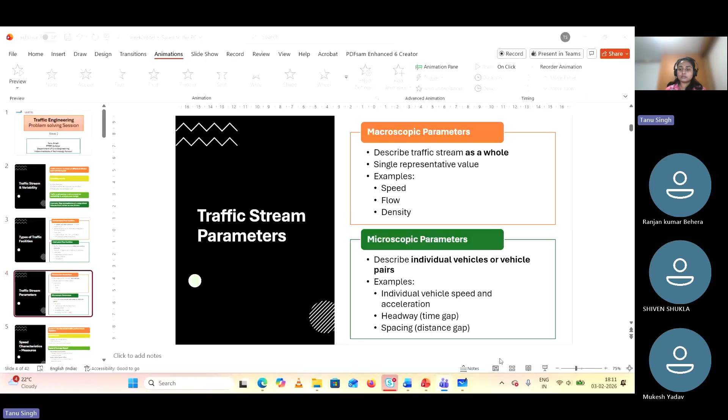Now, as we have just seen, there are three parameters: speed, flow, density, and in microscopic parameters, individual vehicle speed, headway, spacing. So we will go one by one to understand these parameters. First is speed. Speed is the most important traffic parameter. It measures traffic performance and is fundamental in road design and traffic simulations. Speed can be divided into two types: time mean speed and space mean speed.

Time mean speed is the average speed of vehicles passing a fixed point over time, calculated as the arithmetic mean, whereas space mean speed represents the vehicles over a road length and is calculated as the harmonic mean. So for time mean speed, at a particular point, whatever speed a vehicle passes through this point is measured, whereas for space mean speed, over this distance, we calculate for each vehicle its speed over this road length. This is the difference between time mean speed and space mean speed.

And always remember that space mean speed is always less than the time mean speed, because lower speed vehicles occupy the roadway for a longer time. Therefore, space mean speed is always less than the time mean speed.

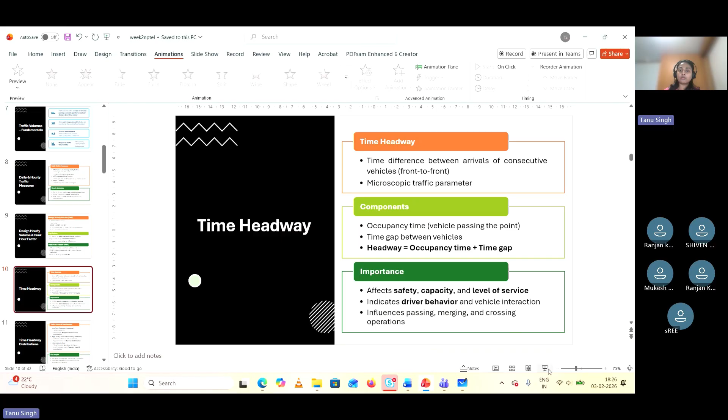Okay, so now we have understood what is time headway. Now we'll understand what is time headway distribution. So time headway distribution varies at different traffic conditions. At low traffic volume, if there is very low traffic, that means the time headway between two vehicles is more. So at low traffic, vehicles interact very little with each other. As a result, headways appear random. So headway is random and it is mainly represented by a negative exponential distribution.

And when the traffic flow is very high, very high means time between two vehicles is very low. So it is mainly a condition of the platoon, or it is a condition of a traffic jam. So in those cases, headway distributions are mainly approximated by a normal distribution. Now, third is the intermediate, that is in between the high and low traffic volume. It is a mix of random and platoon behavior. So that is mainly represented by a Pearson type 3 distribution.

So these are the three distributions. That means there is no single distribution that fits all conditions, like high traffic or medium or low. We cannot fit using a single distribution. For each of the conditions, we have three different distributions, that is negative exponential for low, normal distribution for high, and Pearson type 3 for the intermediate. So this is all about the headway.

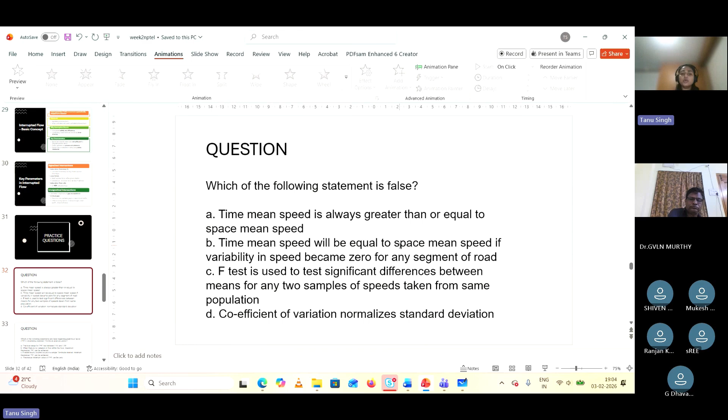Okay, so the correct answer is C, which was answered by most of you. Now we will discuss. The first statement is that time mean speed is always greater than or equal to space mean speed. That is correct; space mean speed is always less. Then, time mean speed will be equal to space mean speed if all the speeds of the vehicles are the same; from the formula, both will come out to be equal. Therefore, this is also true.

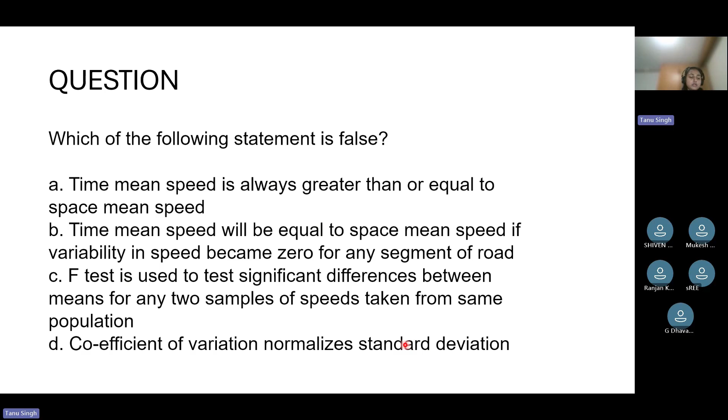Then the D statement was coefficient of variation normalizes standard deviation. That is also correct. But statement C mentioned that the F test is used to test significant difference between means of any two samples of speed taken from the same population. That is false because the F test is primarily used to compare variances, not the means of two samples. To test the means of two samples, we can use either a T test or an ANOVA test. So statement C is false, as answered by most of the people.

Now coming to practice question number 2: which of the following statements are false regarding peak hour factor, considering standard 15-minute analysis? Statement A: the practical range for PHF lies between 0.5 and 0.88. Statement B: when there is no variation in flow within the hour, maximum theoretical PHF can be achieved. Statement C: if the entire hourly volume occurs in a single 15-minute interval, minimum theoretical PHF can be achieved. And D: theoretical minimum value of PHF can be zero. I'm waiting for all of you to answer this question in the chat box. There can be more than one answer to this question.

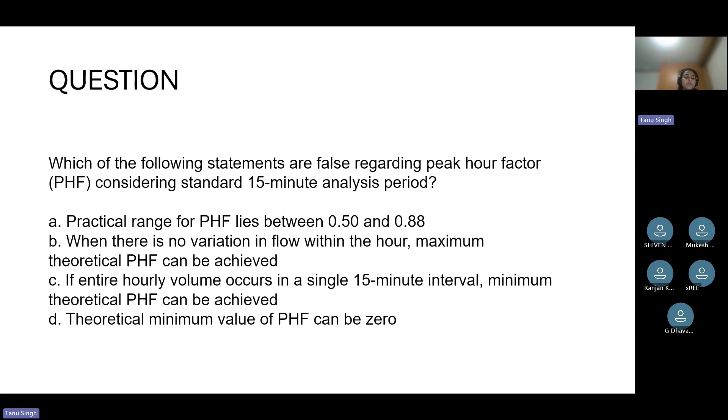Okay, so yes, the correct answer is A and D because we have already seen the practical range is between 0.7 to 0.98. So the first statement is false. The second statement says that if there is a uniform, there's no variation in flow within an hour, maximum theoretical PHF can be achieved.

That is true because the maximum value that we can achieve is 1, whereas the minimum PHF value is 0.25. So how it's 0.25: say if the entire hourly volume occurs in a single 15 minutes, then it will be the minimum. Okay, so yes.

Okay. So this is the formula: PHF is equal to hourly volume divided by 4 into maximum 15-minute volume. If all the traffic volume occurs in that 15 minutes, that means V is equal to that maximum 15-minute volume. So this will be equal to 1 by 4, that is 0.25. So the minimum value that we can achieve is 0.25.

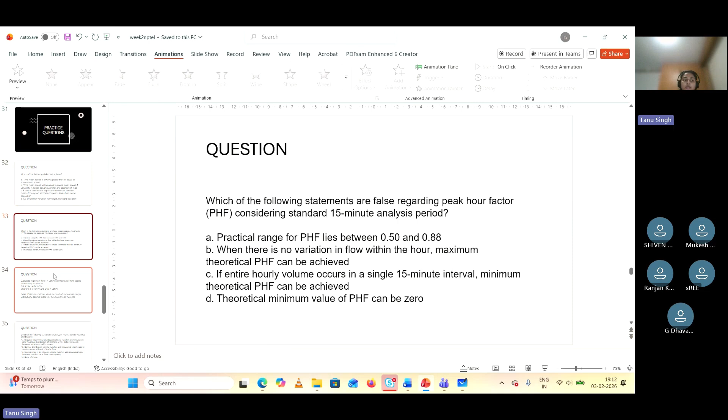Now coming to the next question, that is to calculate the maximum flow of the road if the flow-speed relationship is given as Q is equal to 215 V minus 41 V ln V, where V is in kilometers per hour and Q is in vehicles per hour. So we need to get the nearest integer value.

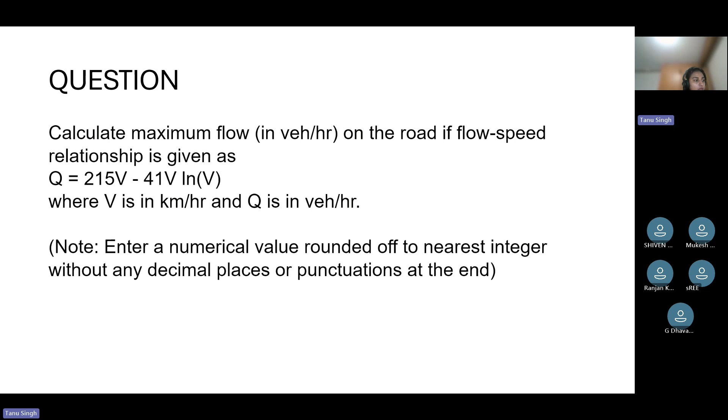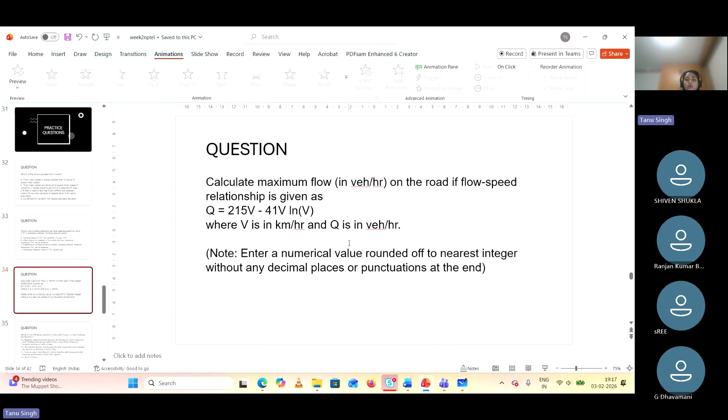Okay, so it is required to calculate the maximum flow of the road if the flow relationship is given. So maximum flow occurs when we differentiate with respect to V, that is dQ by dV is equal to 0. So now we differentiate Q with respect to V. This is 215V minus 41V ln V. So what we get? dQ by dV is equal to 215 minus 41 times (ln V plus 1).

Okay, so then it's equal to 215 minus 41, and then we simplify further. So we get 41 ln V is equal to 174, and ln V equals 174 by 41, which is equal to 4.24, and we do antilog and we get V as 69.6 kilometers per hour.

Now to calculate the maximum flow, we write Q max is equal to 215V minus 41V ln V and put the value of V in this equation, and the answer that we get is 2855. When we subtract 12109 from 14964, we get 2855. So we're getting it between 2852 to 2856. That is the correct answer. That can be a mathematical decimal equivalent to that.

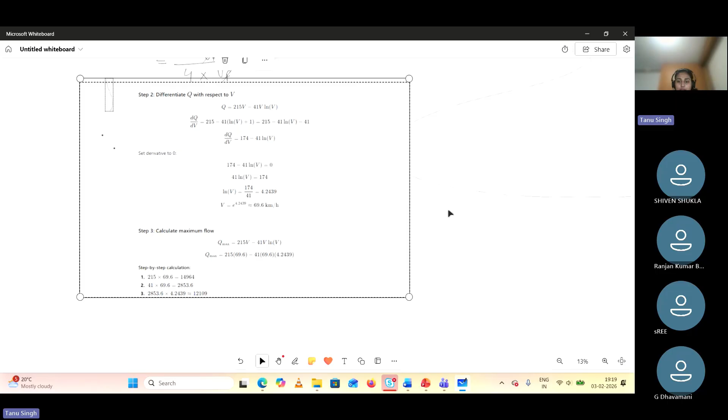So now coming to the next question. Which of the following statements is false with respect to time headway distribution? So first one is: negative exponential distribution closely matches with the measured time headway distribution when there is very little interaction between vehicles in the traffic stream.

Normal distribution closely matches with the measured time headway distribution at all levels of traffic flow. Pearson type 3 distribution closely matches with the measured time headway distribution at flow near capacity. And then D is none of these. This we have already discussed while we were summarizing. All these questions are related to the time headway distribution that we have discussed.

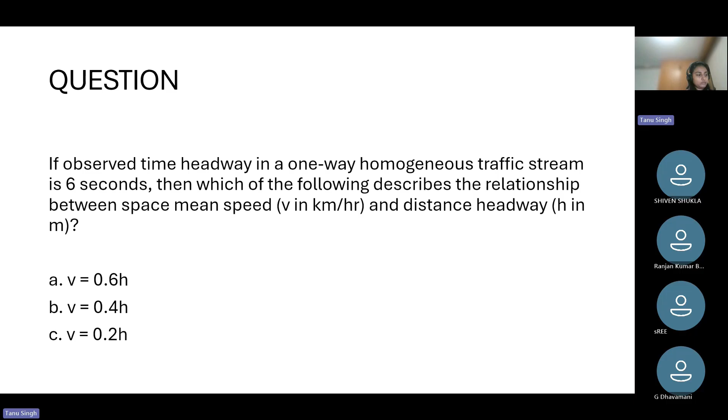Okay. So the answer is A. That is, V is equal to 0.6 H.

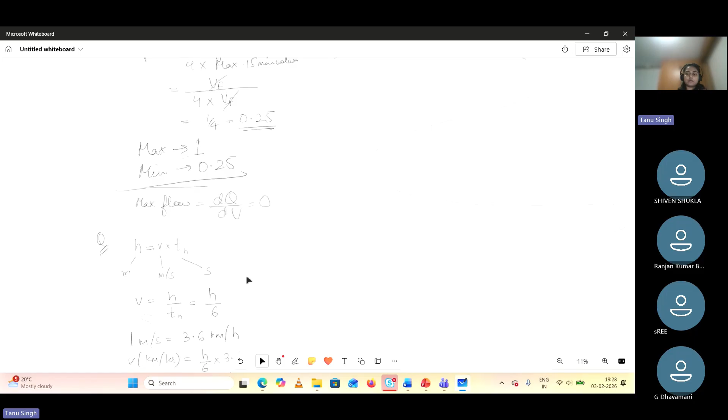So the formula is H equals V into TH. H is the space headway, the distance headway. V is the speed in meters per second, whereas TH is the time headway. So V will be equal to H by TH, and TH has been given in the question as 6.

And since it's been asked in kilometers per hour, we will be converting: 1 meter per second equals 3.6 kilometers per hour. Therefore, V in kilometers per hour will be equal to H by 6 into 3.6. Therefore, we get V equals 0.6 H. So option A is the correct answer.

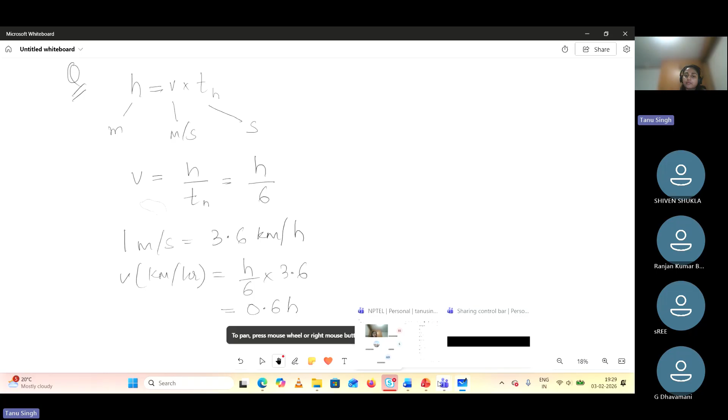Okay, so now coming to the next question, in terms of accept or reject: congestion cannot occur at uninterrupted flow facilities. Answer whether it is an acceptable statement or a reject.

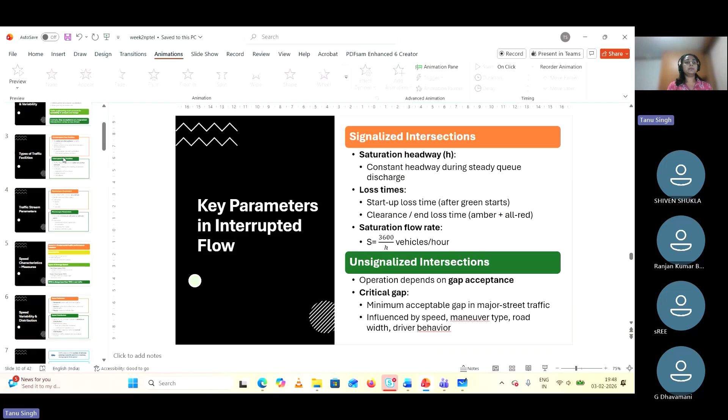I will just summarize today's problem solving session, what we have gone through. Okay, so then we summarize the lecture. First we started by saying there is a variability in the traffic stream because of different types of drivers, their behavior, different types of vehicles that can be found on the road, and different types of road geometry. So there is always a variability in the traffic stream.

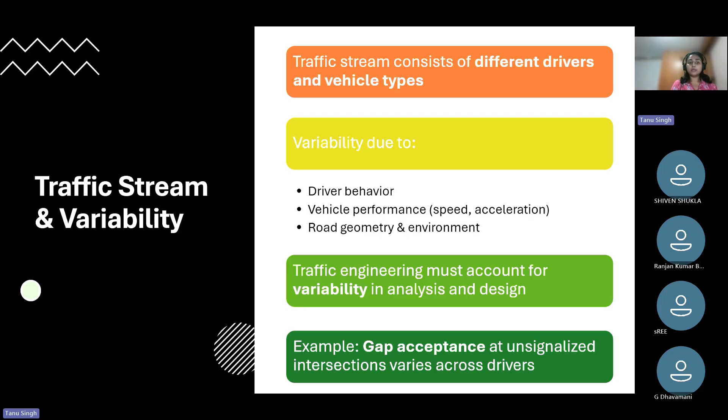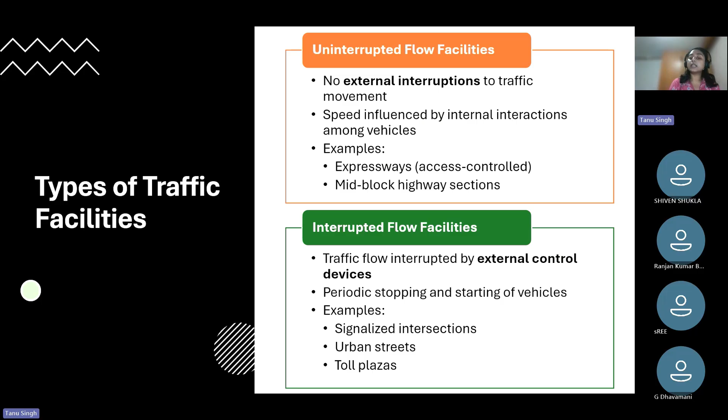Next, we have seen the different types of traffic facilities. There are uninterrupted flow facilities and interrupted flow facilities. Whenever there is an external control, the flow facility is interrupted, whereas where there are no external interruptions like signalized intersections or toll plazas, it is uninterrupted. So expressways or mid-blocks of highway sections are examples of uninterrupted, whereas signalized intersections, urban streets or toll plazas are interrupted flow facilities.

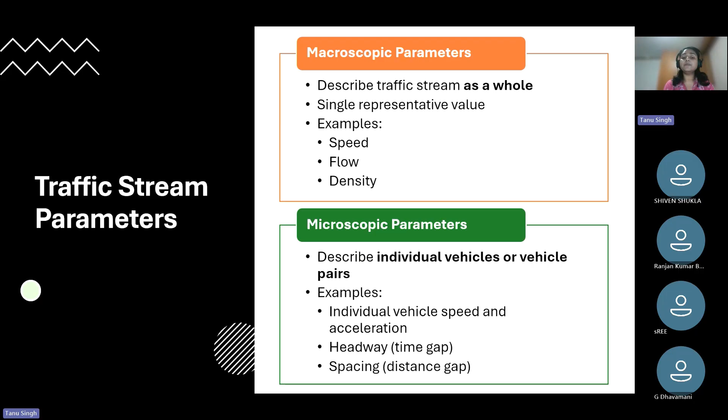Then we have gone through the traffic stream parameters, which can be macroscopic or microscopic. In macroscopic, we treat the traffic stream as a whole, represented by a single value such as speed, flow, or density, whereas the microscopic parameters deal with individual vehicles or pairs of vehicles. Here we consider the individual vehicle speed or acceleration, the time gap, and the distance gap.

Then we have gone through speed. Speed is the fundamental traffic performance measure for road design, for the analysis of fuel and emissions, and also for traffic simulation. Then we have discussed two types of average speeds, that is time mean speed and space mean speed. The time mean speed is the average speed at a point over time, which is the arithmetic mean, whereas the space mean speed is the average speed over a road length, that is the harmonic mean.

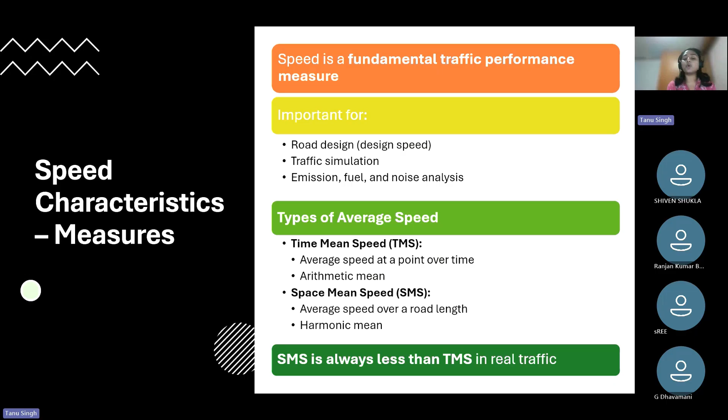And space mean speed is always less than the time mean speed. Then we have gone through the speed variability. Speed can vary depending upon time of the day, different locations, and also by different type of vehicle. Different vehicles will have different speeds. Some are slow moving vehicles, whereas some are fast moving vehicles. Then the speed distribution is often approximated as the normal distribution.

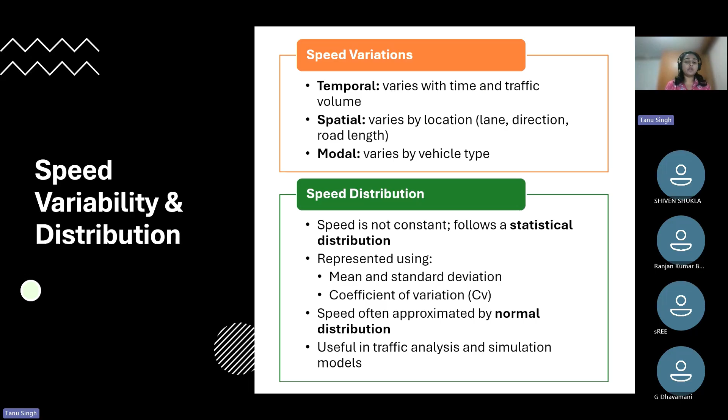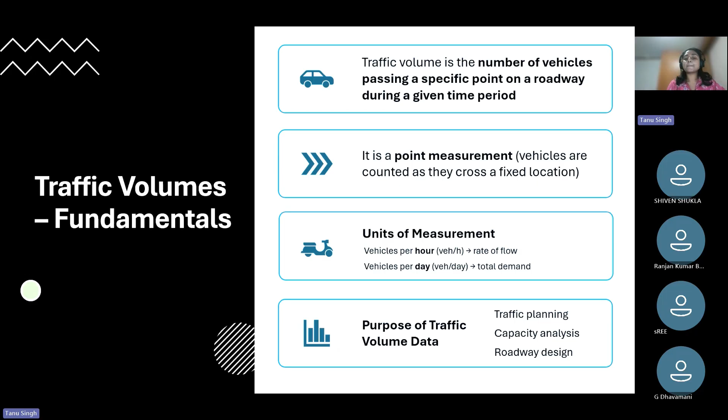Then we have looked at a different parameter, that is traffic volume. Traffic volume was the number of vehicles passing through a point over a period of time. It is always a point measurement. Whenever a vehicle passes through a point, we add it to the number of vehicles over a period of time. It is measured in vehicles per hour or vehicles per day. And its purpose is traffic planning and roadway design.

We have seen different traffic measures. First, ADT is mainly for design purposes. We have also seen the average annual daily traffic, weekday only traffic, and also discussed hourly volumes, because traffic varies, and we can see the major traffic at morning and evening peak hours. Then we looked into design hour volumes and peak hour factor. Design hour volume is defined as AADT into K into D, where it has been taken as the 30th highest hourly volume. We take the 30th to balance economy as well as efficiency.

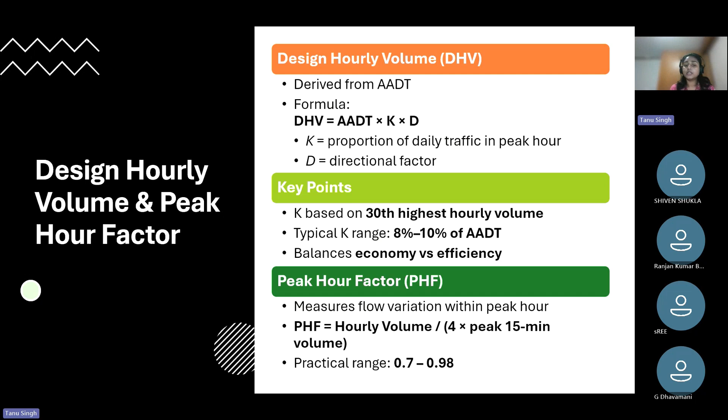Then we looked into what peak hour factor is. Peak hour factor is hourly volume divided by 4 into maximum 15-minute volume. Its practical range was 0.7 to 0.98. Then we looked into time headway. The time headway was the time difference between the arrival of two consecutive vehicles, whereas the space headway is the distance between two vehicles. Please remember, it is always front to front: front of the first to front of the following, not back of the first and front. It comes under microscopic because we are talking about a particular vehicle. These are mainly calculated to learn driver behavior and also passing, merging, and crossing operations.

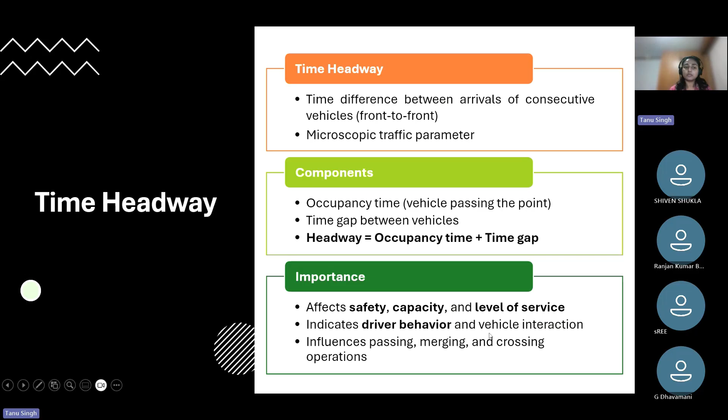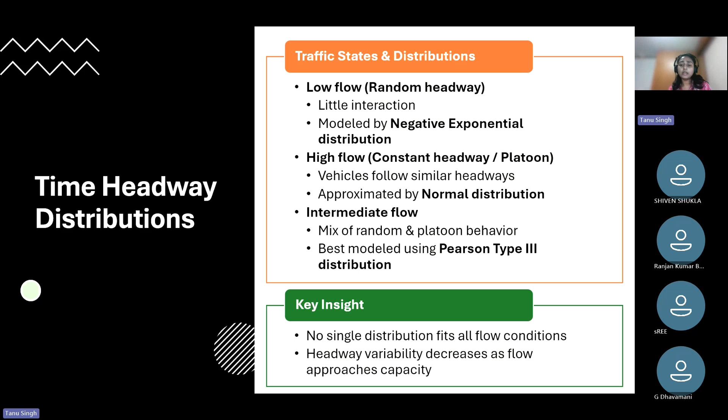Then we looked into the distributions. For low flow, it was negative exponential. For high flow, it was normal distribution. Whereas for intermediate flow, it was best modeled by a Pearson type 3. And we found that there was no single distribution that fits all flow conditions.

Then we looked into the other parameter, that was traffic density. Traffic density was the number of vehicles per unit road length. It was important to understand driver maneuverability and discomfort. It directly affects the traffic flow quality. It can be directly measured by standing at a vantage point and recording a video, whereas indirectly it can be calculated using the formula K equals Q by V. We have seen different levels. If traffic density is 0, it means an empty road. If it is maximum, then it is a jam condition.

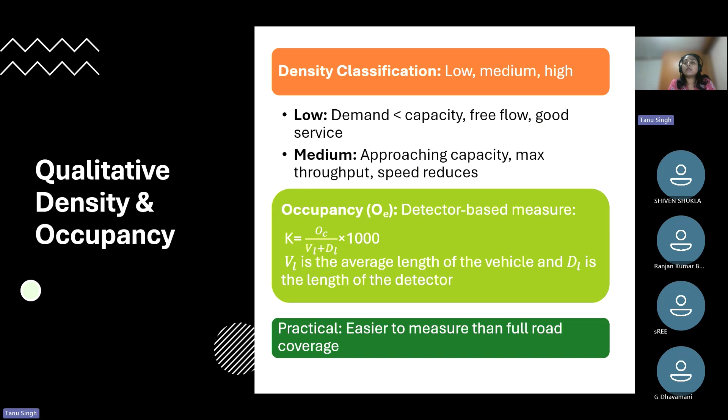Then we also saw how to calculate density from occupancy using a sensor-based method. The formula used was K equals O by (VL plus DL), that is the average length of the vehicle plus the length of the detector. This method was used because it was easy to measure. Then looking into a road of 1 kilometer and calculating the number of vehicles in that particular road length.

Then we have seen how to convert microscopic to macroscopic. These time gap and distance gap can be converted to density and flow. Density can be calculated by 1000 by space headway, whereas flow can be calculated by 3600 divided by h. And V is calculated by Q by K. So this was all about the microscopic and macroscopic parameters.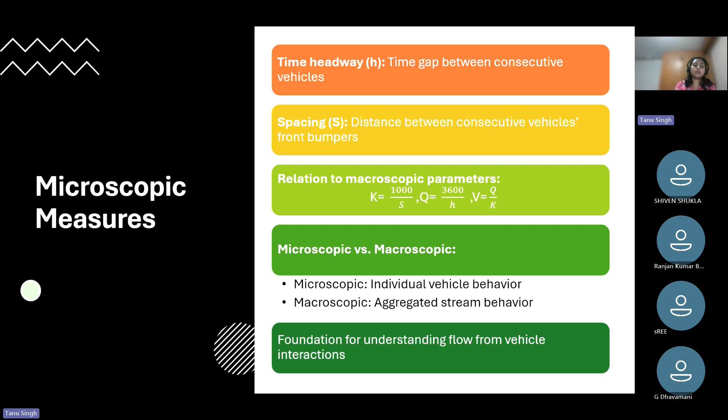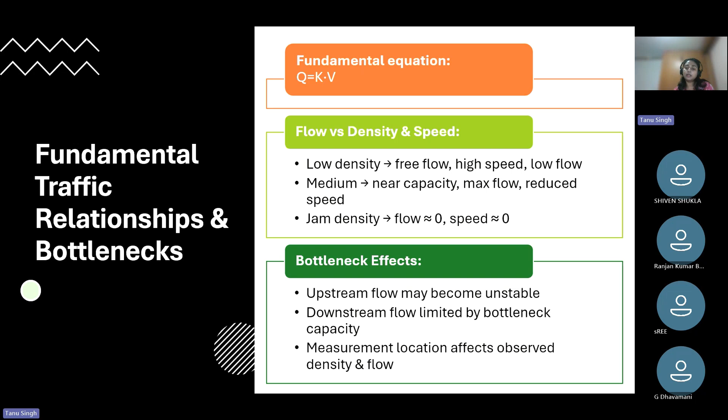Then we went to the fundamental relationship between these three, that is flow, density and speed: Q equals kV. We have seen that at low density there are free flow conditions. At jam density there is a condition where flow is zero and speed is also zero. But there is also a condition, the bottleneck, that might affect these things. There might be a condition where upstream and downstream become unstable and they are limited by the bottleneck conditions.

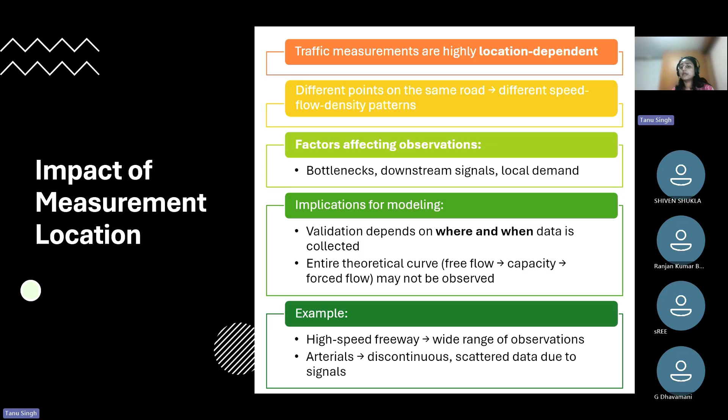Then we have seen that the location where we are measuring these parameters may affect their values depending upon bottlenecks, signal conditions, or local demand. So this validation depends on where and when we have collected the data.

Then we have seen the field data versus theoretical. We found that the field data confirms the trend, but it doesn't clearly match the theoretical value. Theoretically, we assume all these VK, QK, and KV relationships are smooth and continuous, but they are not so in the field data observation.

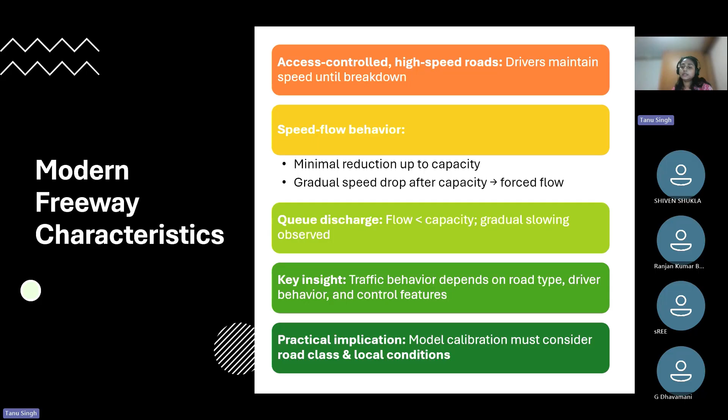Similarly, in the modern freeway characteristics, the driver maintains speed until breakdown, then there is a minimal reduction up to capacity, but the speed drops after the capacity. So traffic behavior depends upon the road type, driver behavior, and control features.

Then we have seen different types of regimes. The first one was the single regime. Single regime means only one equation is used to define all the traffic flow conditions. Mainly the parameters were speed, density, and flow. So there were three models: first Greenshields, then Greenberg and Underwood.

Greenshields assumes a linear relationship between speed and density, whereas for flow it assumes a parabolic one. This was the equation: V = Vf - (Vf/Kj)·K. These were the boundary conditions: when density K is zero, speed is maximum, free flow; when density is jam density, speed is zero. So these are the conditions for the capacity, and since it is simple and practical, it is widely used.

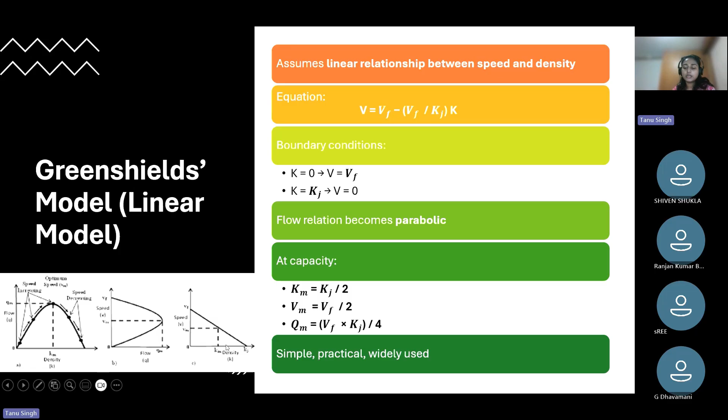So if we compare, Greenshields touches both the speed and density axes, but it assumes linearity, whereas Greenberg's has no finite free flow condition, and Underwood has no zero speed at jam conditions. So it was acceptable at low density, but not acceptable at jam densities. But we found that all these models show one trend: if we increase the density, then the speed is reduced.

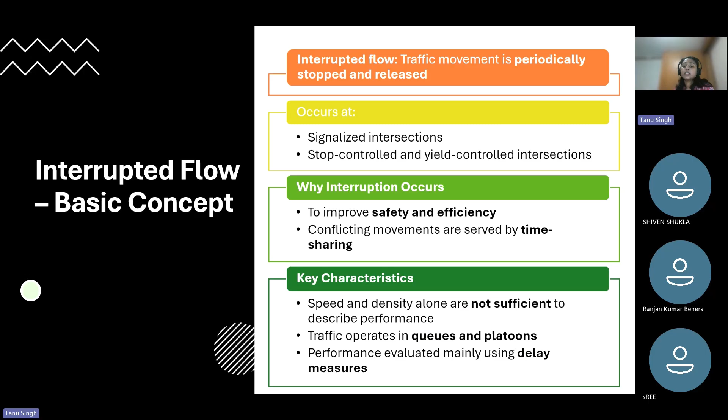Then we came to interrupted flow, where the traffic movement is interrupted by external devices such as signalized intersections, stop-controlled or yield-controlled intersections. Mainly the interruption is done to reduce the conflicting movements of vehicles. So we found that speed and density are not sufficient to describe performance where traffic operates in queues and platoons; therefore delay-based measures are best to evaluate its performance.

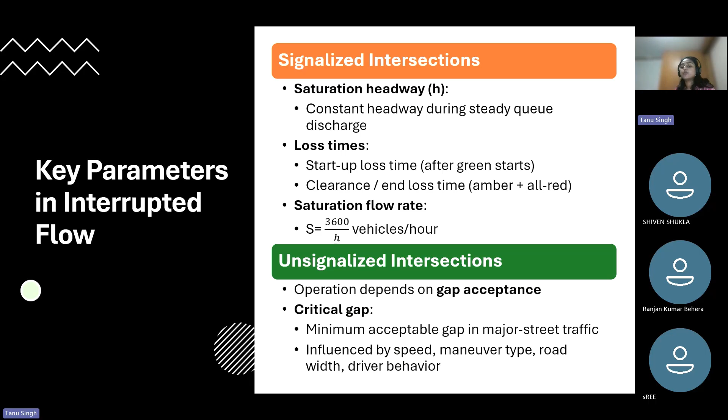So the key parameters of interrupted flow for signalized intersections were saturation headway, lost time, and saturation flow, which can be calculated as 3600 divided by h, the headway. For unsignalized intersections, it really depends upon gap acceptance. Critical gap is the minimum acceptable gap for a driver, and it is mainly influenced by speed, maneuver type, and road width. So this was the summary of week 2 that we have discussed today.